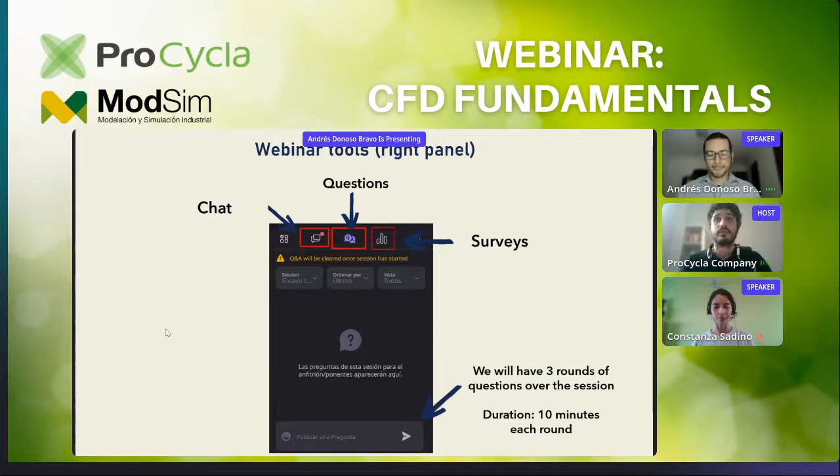So first off, a few words about this team. The name of the team is ModSim, Modeling and Simulation. We basically try to face the challenges that the industry is facing right now, especially regarding circular economy and moving toward fighting climate change. And we do this by exploring mathematical modeling-based virtual prototypes. Thanks to the advances in computation and numerics, we are now able to create virtual prototypes based on models to address these issues at the industry level.

In regards to the content of this webinar, it is broken down into 5 sections, as you can see there. We will start off with an introduction about the main concepts surrounding CFD modeling. From section 2 onwards, my colleague Constanza Sadino will take over, and she will explain the CFD principles, followed by how to prepare the virtual prototype, which software is available to be used, and in the last section we will show you some case studies that you may find interesting.

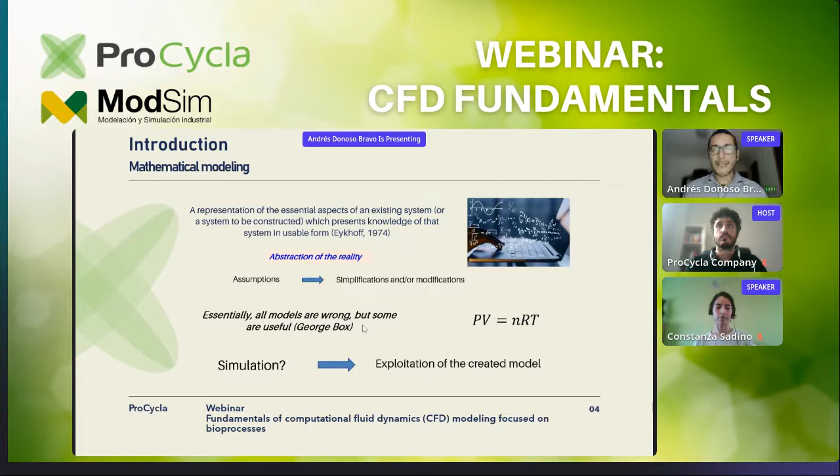Simulation, which is another concept that we often use related to modeling, is basically the exploitation of that model, of the created or taken model. So we can do modeling without simulation, but we cannot do simulation without modeling. So this is putting some concepts there so that we can have a common base moving forward during this webinar.

In regard to models, in general we have two types: phenomenological, which are based on data, where we use data to create these models, and mechanistic models, which are based on the principles of the process that govern a certain system. We're not going to talk about phenomenological models today, but there are several approaches that are very popular now, with machine learning, deep learning, decision trees, several statistical approaches, you name it. That will be worth a different webinar.

In terms of mechanistic models, there are three types: the ones based on algebraic equations, ordinary differential equations, or partial differential equations. But at the end of the day, you're always going to have kind of hybrid models. You're going to take some mechanistic principles, some phenomenological ones as well. So it's always going to be a balance of different approaches. It's not common to have a pure mechanistic or a pure phenomenological model. So those are the types of models that are there.

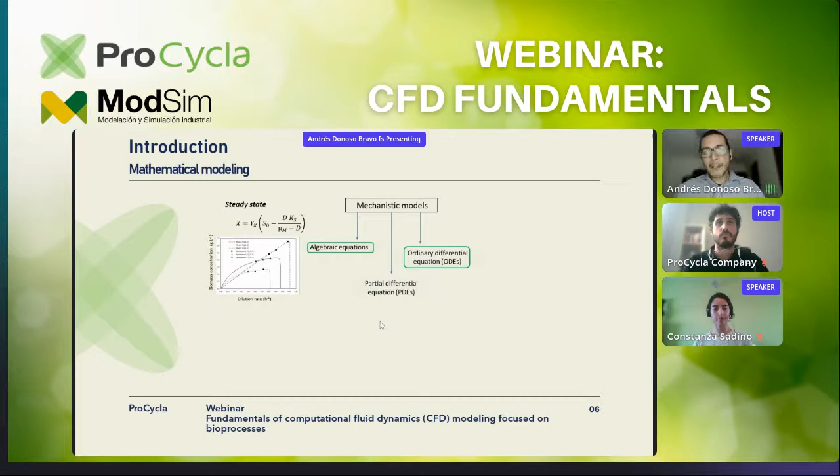Then if we want to consider the transient period of the reactor, not only the steady state, we have to move to ordinary differential equations with this form, which is a derivative. With ordinary differential equations, most of the time we are going to be considering homogeneity, which means that the components of the model are the same regardless of the position inside the reactor. And then we can have this typical graph where we plot the different variables in time, and we have different curves and predictions, right?

And if we want to consider the heterogeneity of the system, which means not only time dependence but also the spatial variation of the components of my model, then we have to work with partial differential equations. So we will have to solve different PDE systems, and most of the time we're going to be working with the Navier-Stokes equation for momentum and other fundamental equations as well. We're going to be getting this kind of nice graph, in 3 or 2 dimensions. So we are getting closer to the physical system. The more complex we get, the more computational cost we are going to be facing. Constanza will talk about that in a little bit.

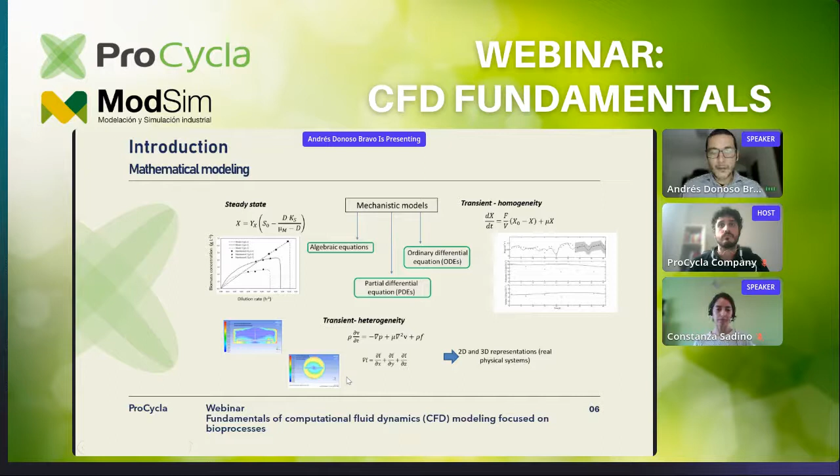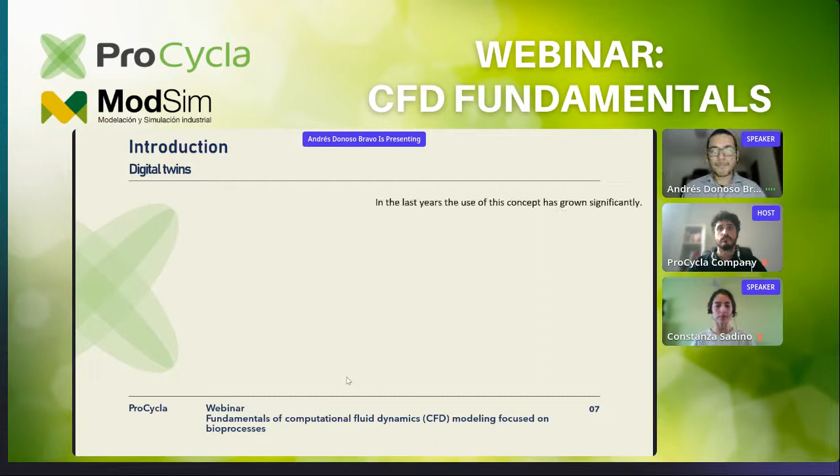So this exponential growth will always lead you to think, well, is it a buzzword? Is it just a trend, or is it an actual concept that is really gaining ground in the scientific world? Well, in my opinion, in many cases, there is not a clear distinction between a model and a digital twin. So if a digital twin is a model, we've been modeling for hundreds of years, so digital twins existed long ago.

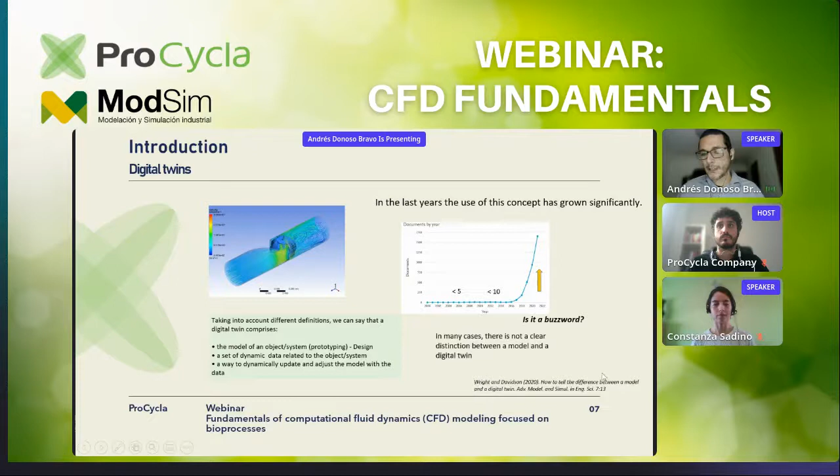If you analyze the literature and the different definitions, we can say that at least a digital twin will have to comprise three things: the model of an object, so the representation of this prototype, so that you can work on the design of it, a set of data that is dynamic in time, and at the same time, you can use this data to adjust and modify the model accordingly. I think with those three things, we can say that we are working with a digital twin. So I recommend this paper here that you can consult. These guys put a nice discussion about the use of the digital twin concept.

So now I will leave the screen to my colleague Constanza Sadino, who is gonna talk about the next sections of the webinar. So please, Constanza, I'm gonna stop sharing the screen. Can you see the presentation? Okay. Yes. Thank you, Andrés, for the introduction.

So now we are going to delve into the fundamentals of CFD. CFD stands for Computational Fluid Dynamics. This is an advanced modeling approach that we can use to analyze and to predict the behavior of a physical system with fluids. Fluids can be gas or liquid. So to apply CFD, first we need to represent the physical system using the transport phenomena equations. These equations represent the balance of mass, momentum, and energy, and how they change in time and in space.

These equations need to be discretized to solve them, so we use numerical methods. We can use finite elements, finite volumes, or finite differences. So we need the discretization of the space and the time, in the case we have a transient model, to solve the equations. And because we have a huge system that is very complex, we have several equations. They are solved using algorithms that are implemented in computational systems. So we could solve a model on our personal laptop, or in the case that the model is too complex, we may need a cluster or another high computational system.

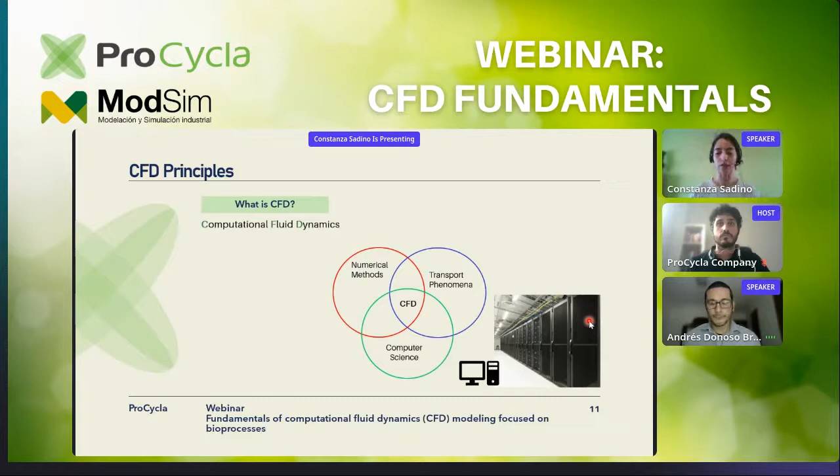In the process of abstraction from the physical system to the CFD model, we will apply simplifications and assumptions that are going to add error to the final simulation. So we have the modeling errors. Let's say we are modeling a tank, and we are focused on the impeller movement, but we know the tank has a heating jacket. But we are going to assume that the temperature is constant and uniform. So that's our first assumption. Then we have the first error.

Then we are going to discretize the system, so we have the error that will depend on the numerical method that we are using. And finally, we have the solution error that will depend on the solver that we are using to solve the simulation. All these errors, we cannot avoid them. So we have to try to minimize them. And when we minimize an error, we are increasing the computational cost. So when we set up a simulation and when we solve it, we will always be dealing with the trade-off between accuracy and computational cost.

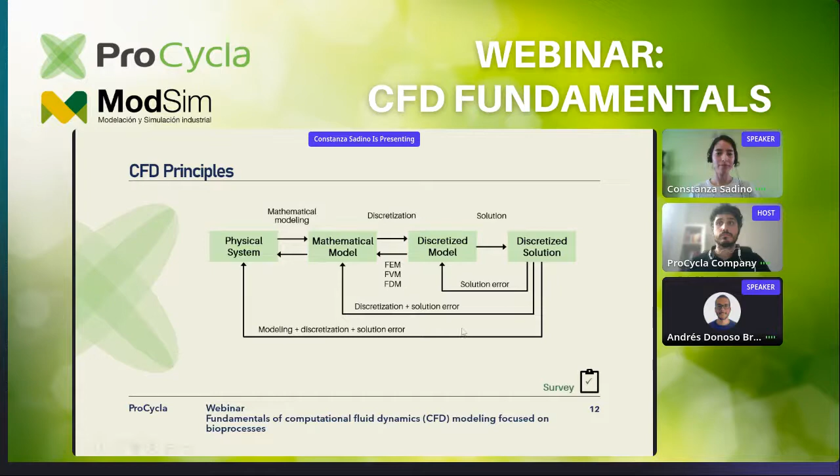So we will have now the first survey. Okay, I'm gonna push it. It's charging. Yes, I'm doing this. Okay. We would like you to answer this question: do you know of any process or system that could be modeled by CFD? So we invite you to answer this question, whether you knew about CFD before this webinar, or if this is something new for you.

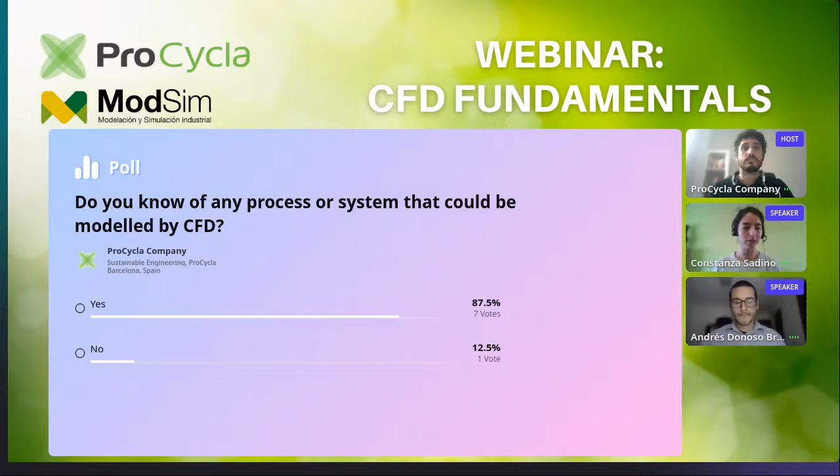Okay. Thank you, Juan Ignacio. Okay, so I think I need to share the screen again. Yeah, I think. Okay.

Can you see the presentation? Yeah, it's available. Thank you.

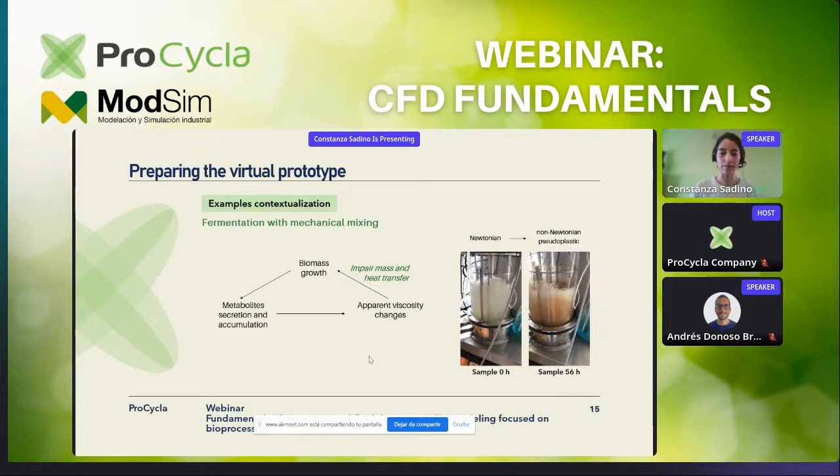So because we cannot model exactly the kinetics and the whole fermentation, we apply a more simplified strategy. So we use three fluids to represent the fluid dynamics of three different stages of the fermentation. So we can use, for example, water to represent the fluid dynamics of the system at the beginning of the fermentation, and we can use two non-Newtonian fluids to represent the intermediate and final stages of the fermentation. Solution A has a higher viscosity than the other solutions under the same operating conditions.

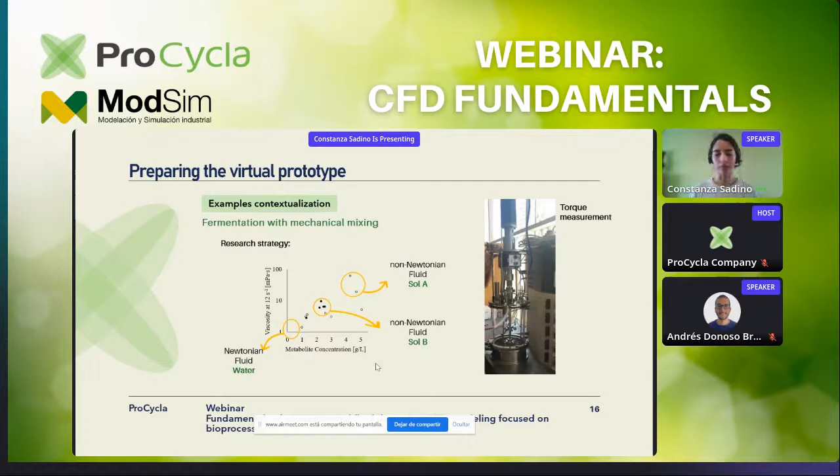Also, if we use this strategy of using abiotic fluids to mimic the fluid dynamics of the fermentation, we have some advantages. So, for example, we can isolate the effect of the impeller mixing from the effect of the aeration, so we can understand how they interact. To measure the effect of the viscosity on the fluid dynamics, we measure the torque on the impeller. So this is the main variable that we use to validate the model. And we will know what is the validation later.

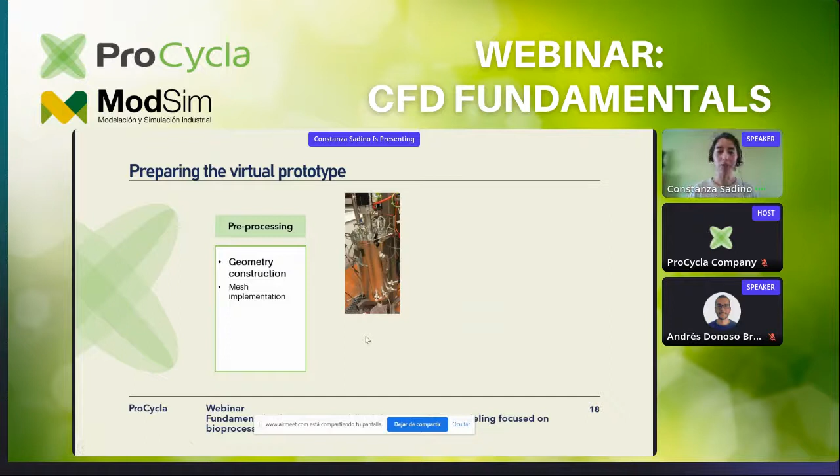So let's see how we start the pre-processing stage. So if we have this tank, okay, we need to have a virtual representation of this tank. So the first thing that we could do is to build this geometry through computer-aided design. However, this domain is not useful for CFD because CFD uses the domain, the volume that the fluid is using. So, for example, we don't need the external structural support. So, what we need is the volume of the fluid. Okay.

Also, we have to consider the simplification of the geometry. There are small details that we can delete from the domain and that will not affect the fluid dynamics. So, for example, we don't need to model the screws. Also, we need to think how we are going to represent the phenomena that we want to model. So, in this case, to model the movement of the impellers, we need to divide the geometry with these cylinders around the impellers in order to be able to set up the reference frame for the movement. Okay, and also we may need to divide the geometry further in order to improve the quality of the mesh.

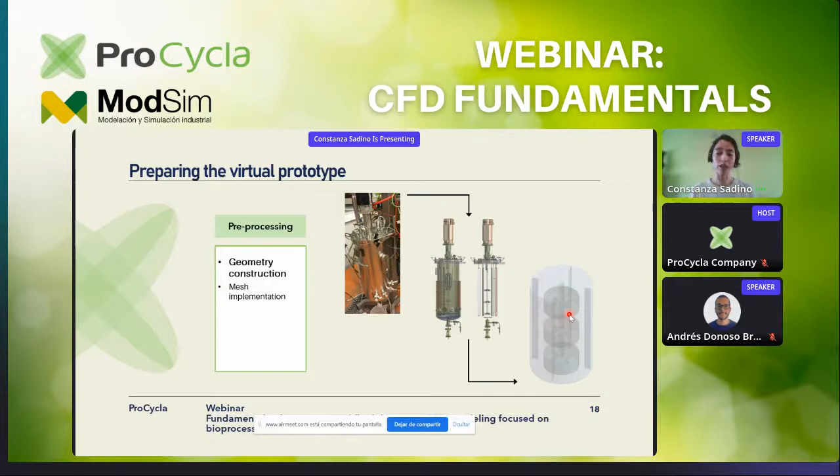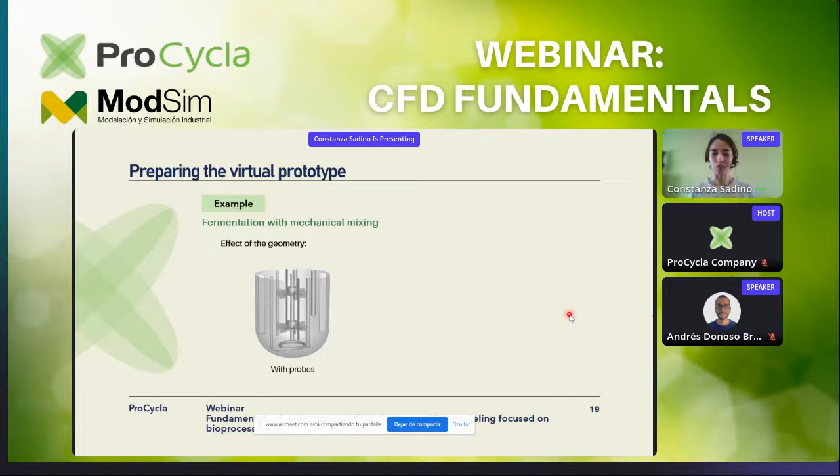So we have to consider what is the purpose of the model in order to conclude if this simplification could change the conclusions of the final result or not. Okay, so there is not a correct or incorrect answer here. It's just the purpose of your model that determines what you can do without affecting the final results.

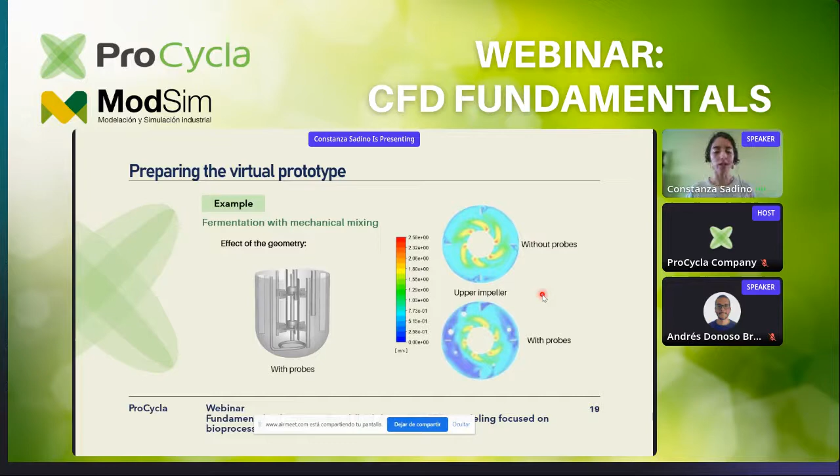So if we have an irregular geometry, tetrahedrons will be the easier and faster way to mesh the geometry, but tetrahedrons add numerical diffusion. What means a numerical diffusion? It smooths the gradients artificially, so we have a less accurate result. On the other hand, the hexahedrons, they are more accurate. Like they can give us a more accurate result, okay?

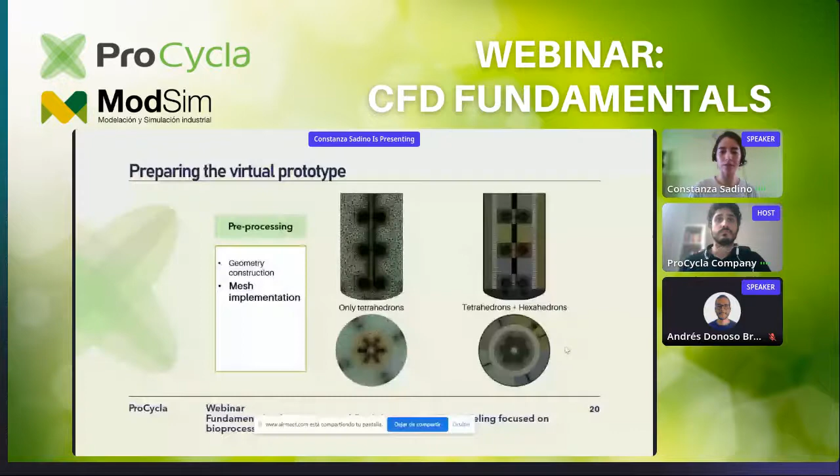So thank you for your participation. Now we will continue with the presentation. Can you confirm if you can see the slides, please? Yeah, it's available. Okay, thank you.

So now we have the geometry and we have the mesh, we need to define the models that are going to represent the phenomena that we want to study. So we need to characterize the system. How is the flow regime, which type of fluid we are working with, how many phases we have, do we want to model the species transport, do we want to model the temperature, or we want to see this as the stationary state, or we want the transient state. All these things are going to define the final model that we are going to simulate.

So let's see how we choose this. So we'll have some criteria that will be based on the physics of the system. So for example, if the system is laminar or turbulent, that will depend on the Reynolds number of the system. Let's say that the system is turbulent, then we will have to use other criteria to choose the proper model. So depending on the complexity of the system, if it is too complex, we will prefer to choose a model that will help us to stabilize the solution. So we will use k-epsilon.

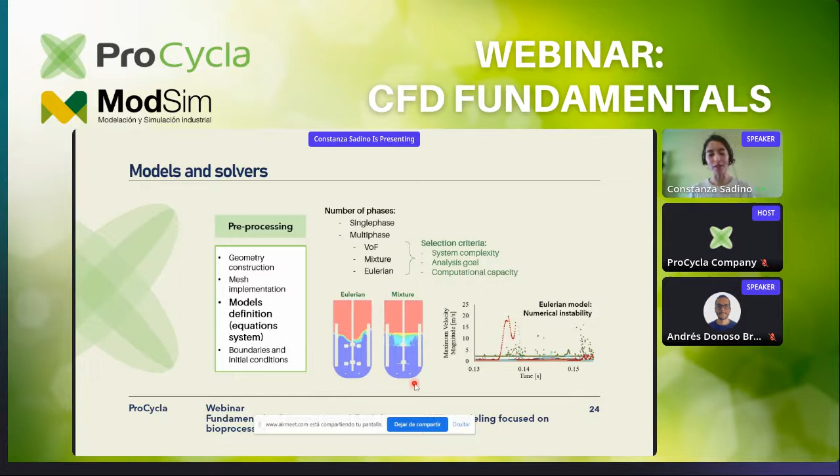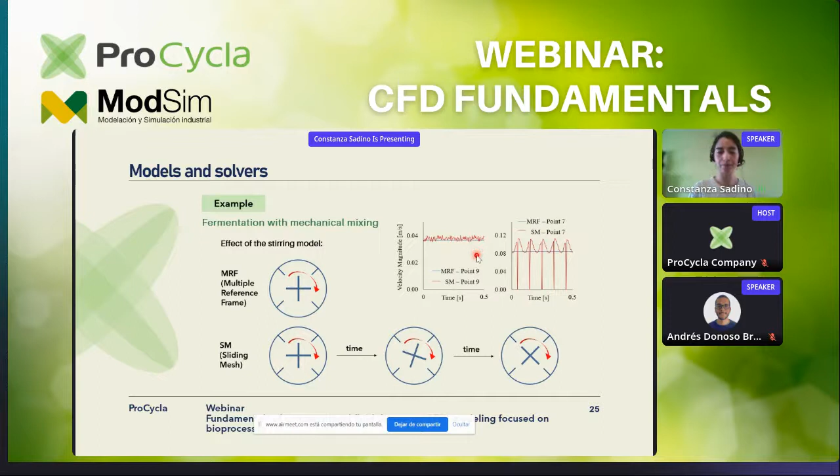Once we have the models, that means we have the equations, we need to define the boundary and initial conditions that will allow us to solve the system of equations. For that, we need information such as, for example, the tank: is it closed or is it open? If it's closed, we will have no slip condition, which means that the liquid is touching the cover, and so at that point it's not moving. If it is open, then we have an interaction with air, so the air is not impairing the movement of water, so water moves freely. Those conditions are different, so we will have a different solution depending on which one we use.

Also, we have to define the initial condition. So is the system initially at rest? Or also, if my system is unstable, like if the models that I choose are unstable, maybe I should select an initial condition that is going to help me to stabilize the solution first. All those things we have to take into account when we are pre-processing the model.

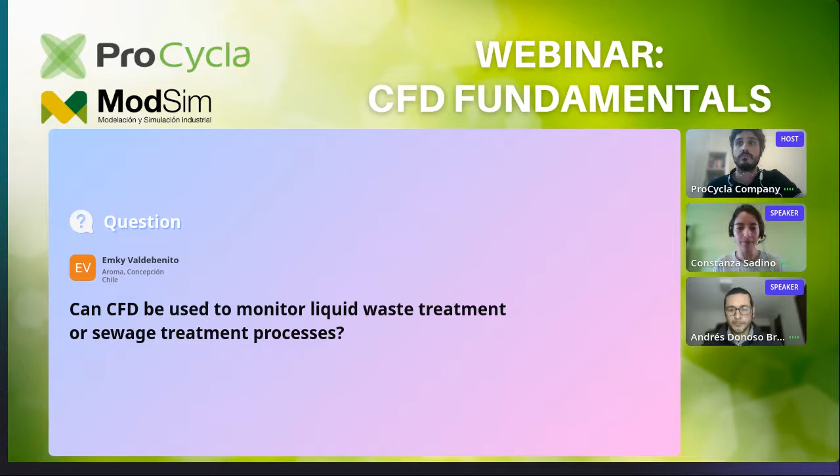If I can translate it, if you want. Yeah. So, which kind of criteria do you use to decide until which point you want to get a more complicated model to get a more accurate answer?

So, well, first, it will depend on the resources that you have to solve the model. If you're using your personal laptop or a cluster, then you will have different limitations. Also, the time. Like, if you can wait for 12 months or for 1 month, then that will also put a limit on the complexity of the model.

Also, you have to take into account what you are going to use the model for, and also the level of accuracy that you have for the experiments, because you will need to validate the model. We will see that in the next sections, and the validation is against experimental data. So you know that we always have error in the experimental data. So we cannot validate the model with a higher accuracy than the accuracy of the experimental data.

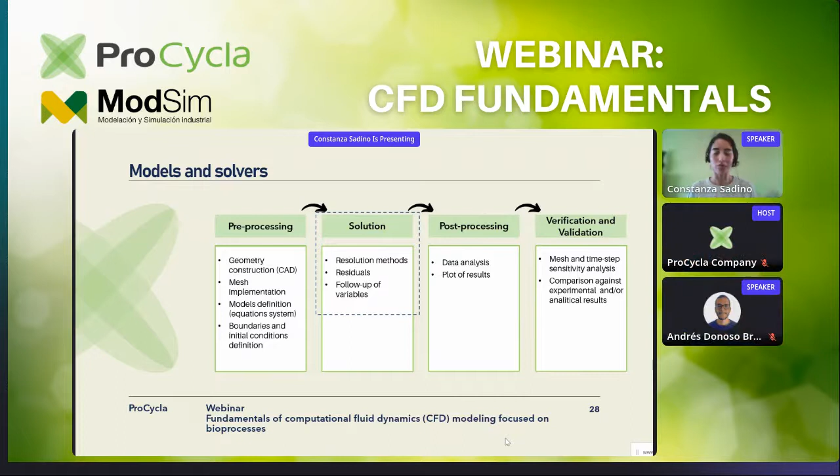Better. Okay. So once we have the pre-processing stage ready, we can solve the model. How do we do that? So we need to use the solvers. The continuity equation of transport phenomena has the density as a variable. CFD couples the density and the velocity that is in the continuity equation with the pressure. Okay, and for that we have to select the solver.

If we want to have a cheaper choice, we could use SIMPLE. But for SIMPLE, if we have a transient simulation, we will have to use a finer time step than if we use PISO, for example. So again, it's a trade-off between accuracy and the computational cost that we can afford.

Also, the discretization methods: we can use first order, that is going to be faster and easier to stabilize, but is less accurate. Or we could use second or higher order, that may take longer to stabilize and to finish the simulation, but is more accurate. So, as I have said before, it's always this trade-off between accuracy and computational cost, and also the stability of the simulation.

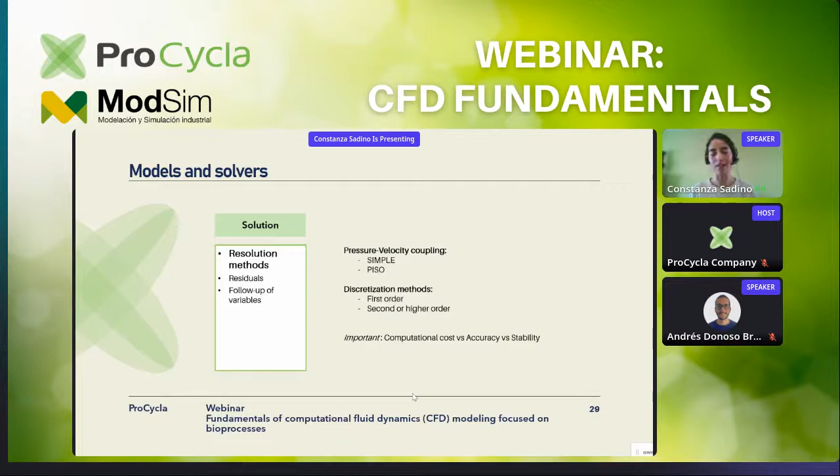When we are solving the system of equations numerically, we have a set of iterations. To measure the convergence of the iterations, we have to follow up the residuals. Okay, so there are some ideal values that we should expect to have. Below 10 to the power of -3 is the ideal for engineering purposes, but if we can have a solution that is below 10 to the power of -5, it's better. And for purposes of publication, like to have an article in a journal, probably you will be asked to have a residual below this value.

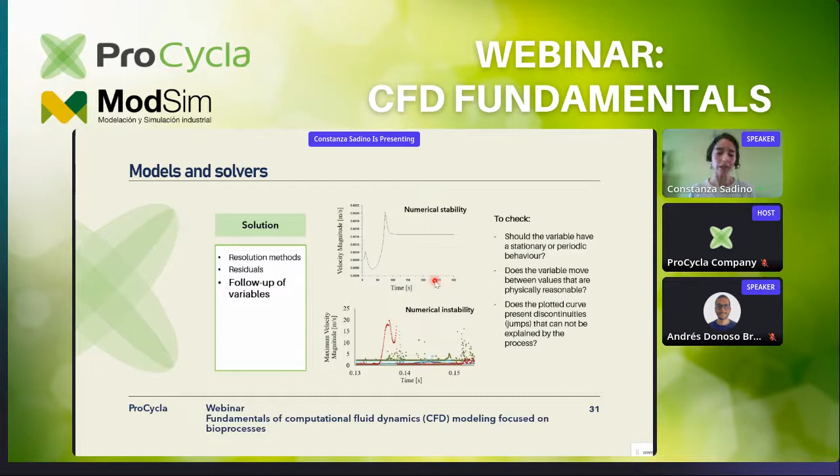Even if we have very small residuals, the solution may be unstable. So we have to check other variables that are critical for the model. For example, in the case of the tank with the mechanical mixing, we need to monitor the velocity. And depending on how that velocity is behaving, we can identify if we have some numerical instability.

And we have to take into account if we are expecting a solution that is stationary or periodic. We have to take into account which values have a physical meaning for our system. And if we see discontinuities, if we see jumps in the values, then probably we have a numerical instability. And we need to improve the models, choose another model that is more stable.

So here we have another survey. Okay, Juan Ignacio, you can. It's already published, right? Okay.

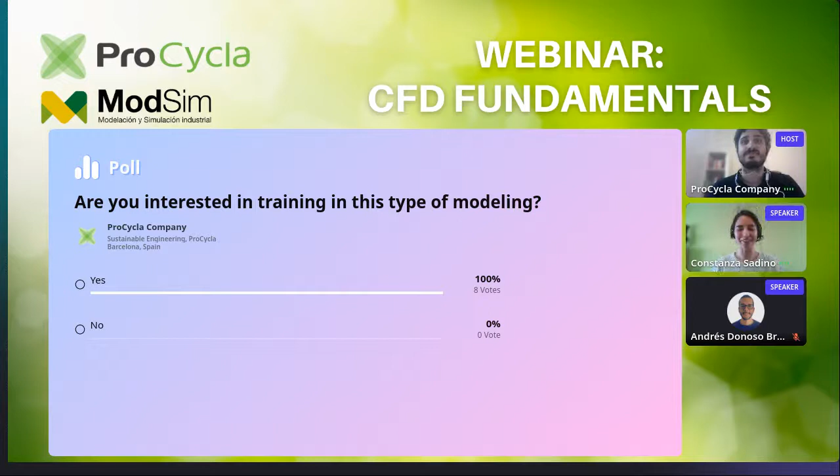Right now. Okay. So are you interested in training in this type of modeling? Would you like to learn how to implement a CFD model? We invite you to answer this question. So yes, everyone that answered the survey agrees that they would like to learn more about CFD. Perfect. So let's continue.

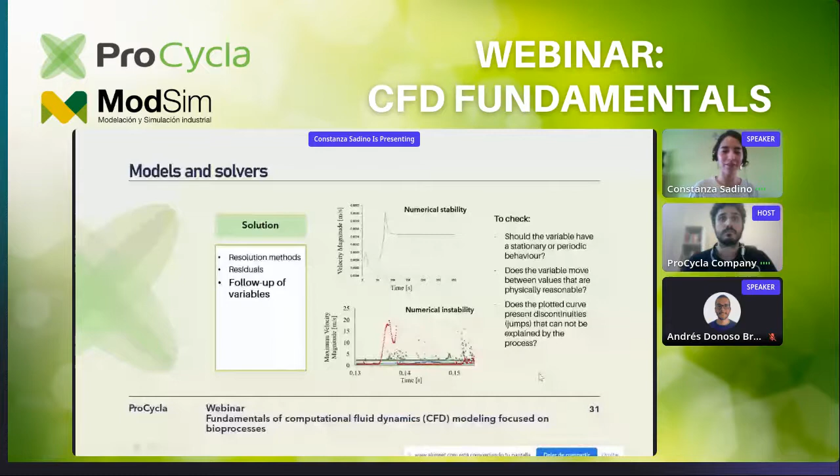So first, what is the purpose of your study? What experimental or analytical information do you have? So if you have information about the velocity, then probably you want to plot the velocity and compare the experimental versus the simulated values. What do you need? You need the information for a point, for an area.

For example, you want the concentration of certain species at the outflow of your system, or you want a volume value. Do you want to see the changes of these variables in time? All these things we have to have in mind when we are setting up the model to be able to analyze them at the end. How can we visualize this information?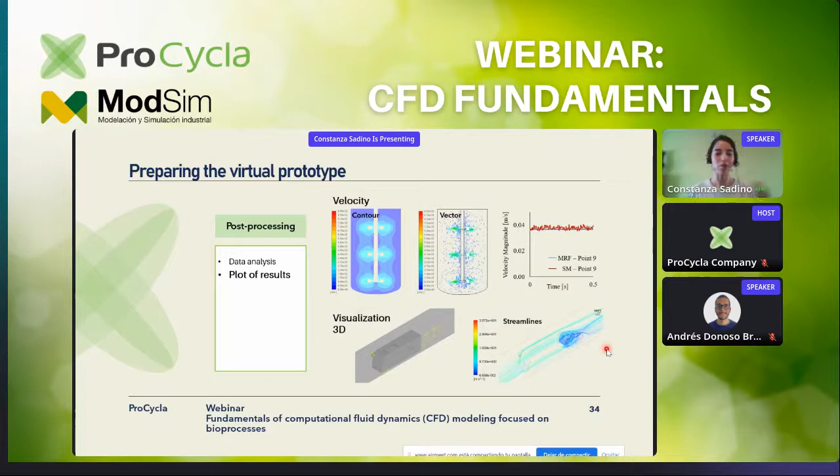Well, this case is a bit different. Here we have a bus, and here we are visualizing the air vortices that are formed at the back end of the bus. And for that, we use streamlines. So as you see, we have many options to visualize the result, and that's one of the strengths of CFD, that allows us to see our system from a different perspective.

Finally, we need to go through verification and validation. So what is verification? If you remember, we use a discretization to solve the system of equations. So the level of the discretization, how small is the cell that we are using, is going to affect the result. So we need to assess if we are using a cell that is fine enough to capture all the phenomena that are inside our system.

So for that, we will use different meshes that are going to be similar in the sense that if you have a refinement around the impeller, the three of them are going to have the same zone with a refinement, but we will have a coarse mesh, a medium mesh, and a fine mesh. So what is the purpose of this? If the coarse mesh has the same result as the fine mesh, it means that the coarse mesh is fine enough to simulate a result that is not affected by the discretization.

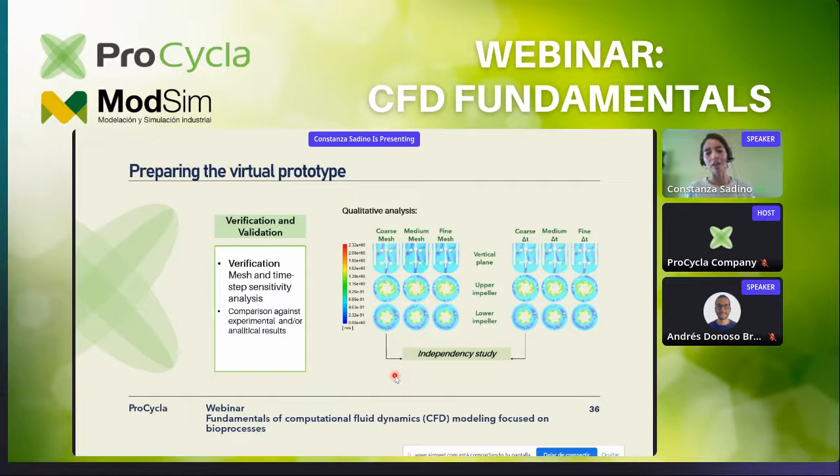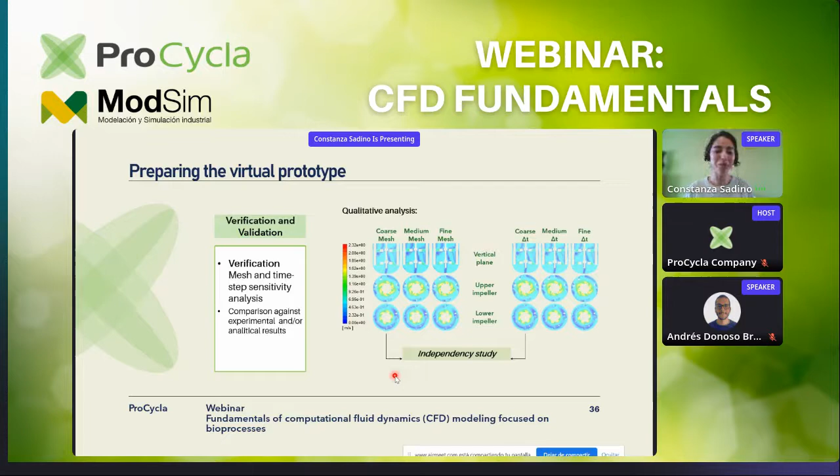Okay. The same if we have a transient simulation. The time step we choose has to be fine enough to capture all the phenomena that we have in the system. If we have this condition, then our coarse mesh is independent from the discretization. Okay, so the idea is to have a fine mesh that is able to capture everything, but that fine mesh has to be as coarse as we can in order to save computational resources.

When we have the verification done, we have to assess the model to check if we are modeling the physical system properly. For that, we can use different variables. So the ideal variable is a global one, where with one parameter you capture the fluid dynamics of the whole system. So for example, torque. Torque is able to capture the effect of the viscosity with just one parameter, but with the effect of the viscosity in the entire system.

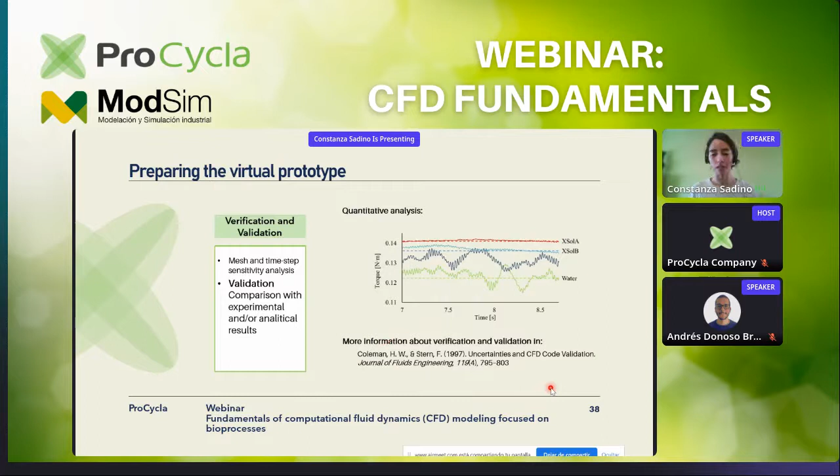There are some parameters that you can calculate to have a final validation. That's beyond the scope of the webinar, so we left you here the name of the paper that you can read in case you want to know more about this.

So we are in the second round of questions. Right. We have a question by Javier Saleh. I didn't understand how to represent the movement of structures in the geometry.

Okay, so in the case of the tank, you have to define a cylinder that is surrounding the impellers. What you will be modeling actually is the movement of the cylinder, because you will change the reference of the movement. You will use the cylinder as reference for the stirring of the blades, and then you can use two approaches. You can use a steady state approach, where the impeller is fixed and you have kind of an average velocity. Or you can use a transient approach where you actually see the movement of the impellers and the effect of the passage of the blades, how the velocity changes in time.

It's a bit complex, but the main idea is that the reference of the movement is changed. So the equations include a different velocity for the movement of the impellers.

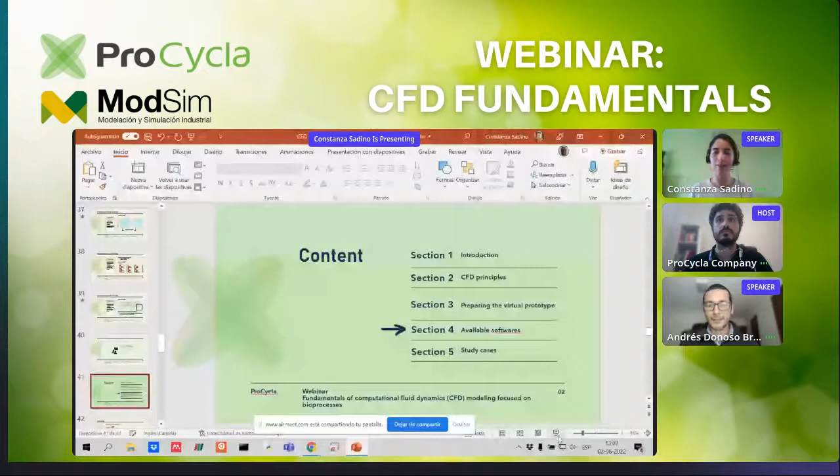Perfect. So I mark it as answered. Okay, let's wait a few seconds if there are any more questions. I would say let's continue because of time. Okay, perfect. We have a certain time frame, right? Okay. There will be another section of questions at the end. Yeah. Right. Okay.

So now we know how to prepare a CFD model, and we need to know which software we can use. We have commercial software, and we have free and open source software. The free and open source software is mostly focused on certain tasks of the workflow to implement a CFD model. So if we use open source software, we may need different software for each stage: one for the geometry, one for the mesh, one for the resolution, and another one for the visualization. So here we have how Blender looks.

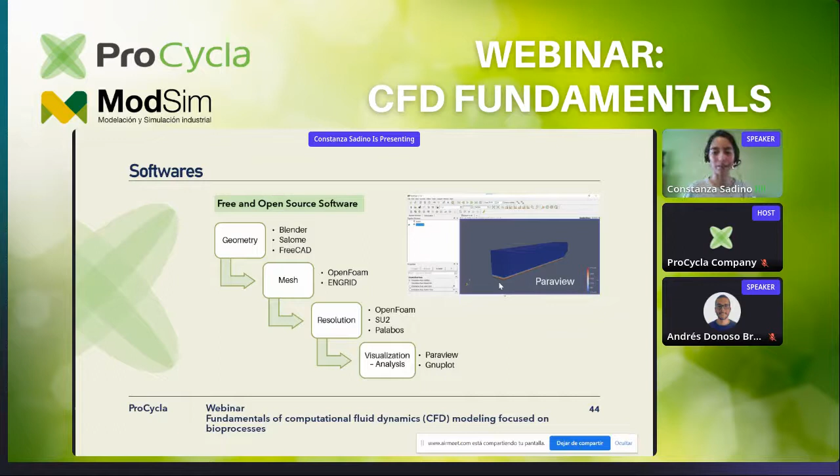In the case of the commercial softwares, they have tools for the task of all the stages. So, for example, ANSYS provides a software for the geometry, a software for the mesh, software for the solution, and a software for the post processing. And it's very user friendly. You can see here you have boxes, buttons, and you just press them, and you define your model.

Because it's very easy to use, also it's very easy to abuse, as my PhD supervisor says. It can be sometimes a disadvantage because sometimes we don't know what we are pressing, we don't know what it means. So you have to be aware of what you are defining when you press a button.

And also because of that, it is less flexible than OpenFOAM because you are not coding your model, you are just using the model that is already coded. So it's less flexible.

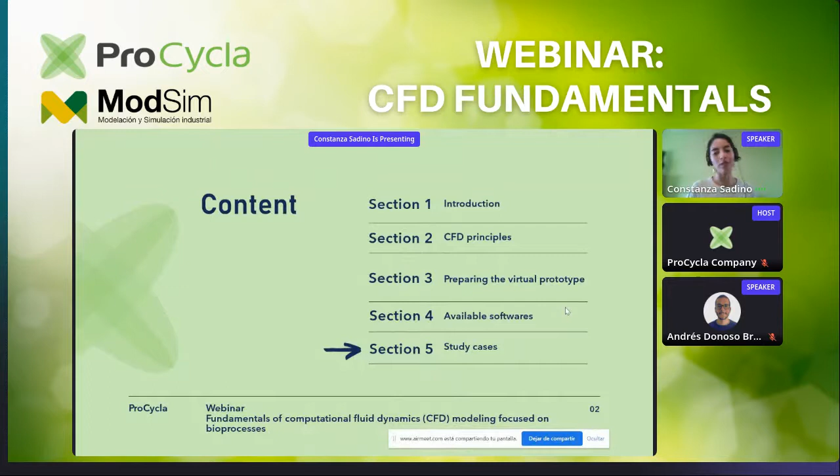So now let us see some study cases to see how we can use CFD on bioprocesses. Okay, so first we have the case of biopolymer production. So in this case, we have a tank. It has two impellers, and during the process, the viscosity of the fermentation broth changes and it increases. So how does that change the fluid dynamics of the system?

So we could expect that close to the final stage of the fermentation, we will have higher mixing times because we have this flow pattern that is named parallel flow pattern, which means that the impellers are working independently from each other. So that means that we don't have much interchange of fluid between the compartments, so it takes longer to mix properly.

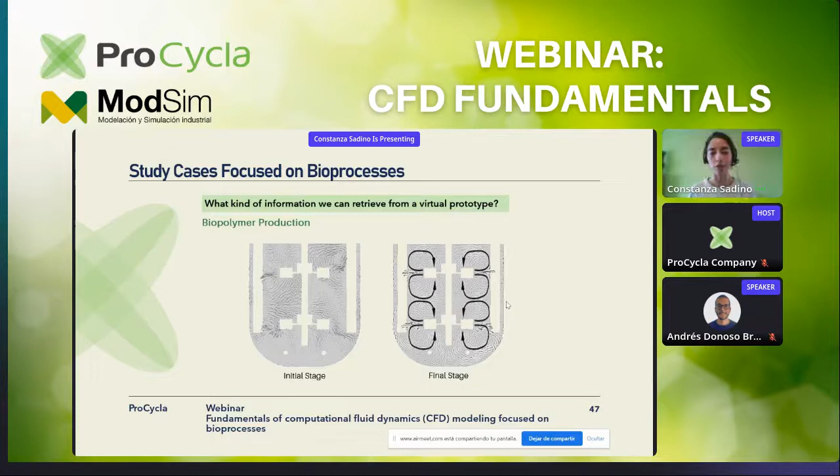Why is that happening? Why do we have this kind of flow patterns and why are they changing? We can answer that looking at the vortex formations. Here we see the evolution of the vortex that we have around the axis of the impeller, and we can see that the vortex has a shape that changes as the viscosity of the fluid increases. And this shape of the vortex could explain the evolution of the interaction between the impellers.

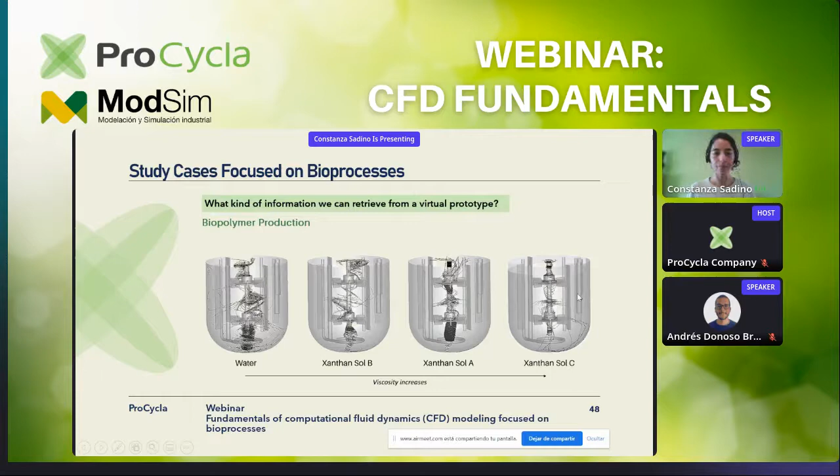This vortex is also important because it's going to help us to avoid the sedimentation of particulate matter in the bottom of the tank. So here we can see a swirl that is moving upwards. Okay, this phenomenon is called Ekman Layer, and it helps us to move the microorganisms that are in the bottom of the tank upwards to keep the system well mixed.

And we can see how this vortex changes as the viscosity increases. So we could expect that at the final stage of the fermentation, we will have a more significant sedimentation of particles, and therefore we'll have a system that is more poorly mixed.

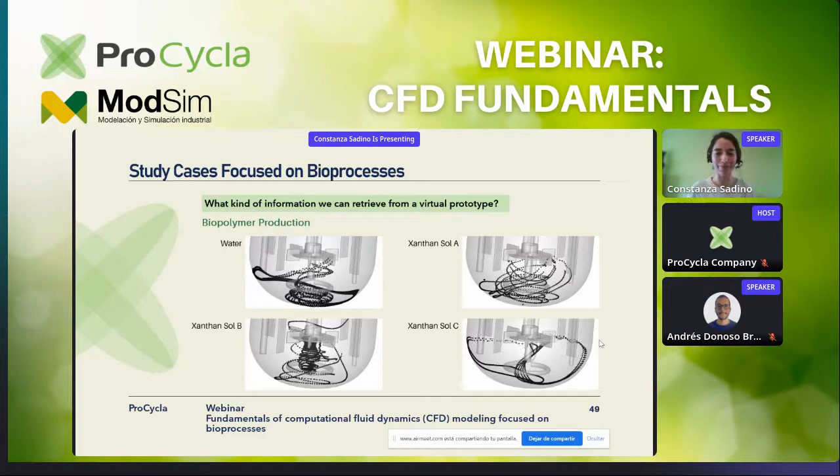There are other vortices that are very important. These are the trailing vortices. So they are formed behind the blades as the impeller moves. And here we can see, okay, I think you should be able to see the videos. The trailing vortices are moving.

And you can see that as the viscosity increases, the vortices are shorter. Okay, so the length of the vortices changes and the area that they span is reduced. This means that the mixing is being impaired by the viscosity, because these trailing vortices are actually responsible for the mixing process. So as we have changes over the fermentation, we can see that the trailing vortices are evolving as well.

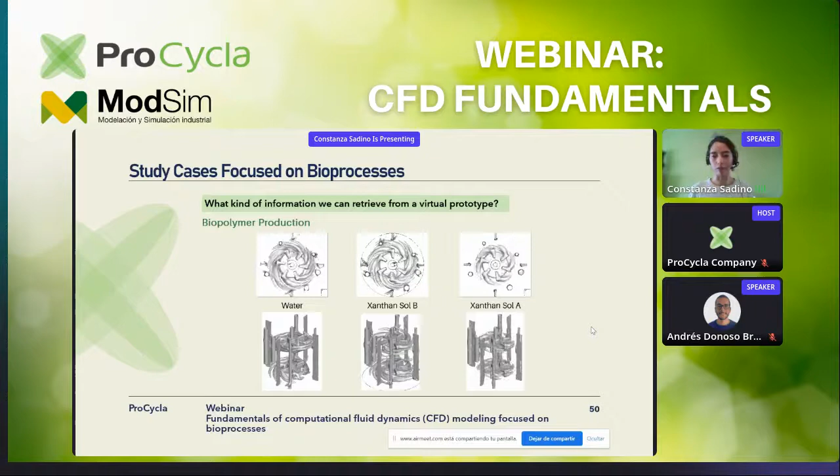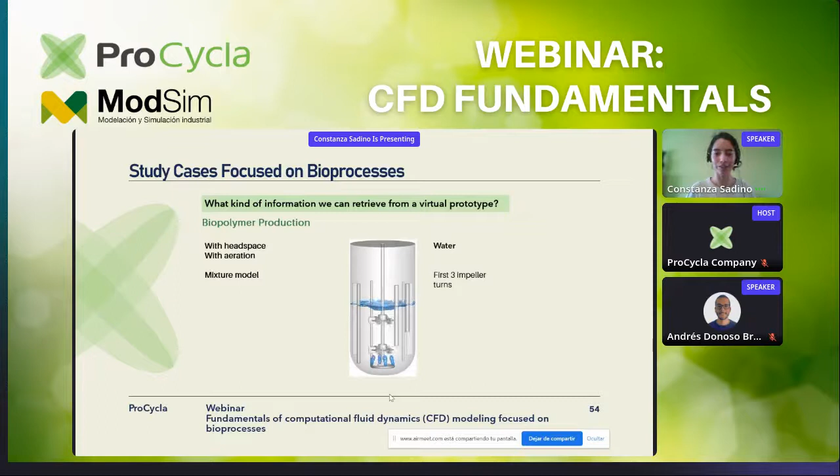Here I'm going to show you a video. So the surfaces that you see in this video are the interface between the liquid and the gas that we have in the system, and the color that you see here is the velocity. So blue means that it is at rest, 0 velocity, and a more red color means a higher velocity. So I'm going to play the video.

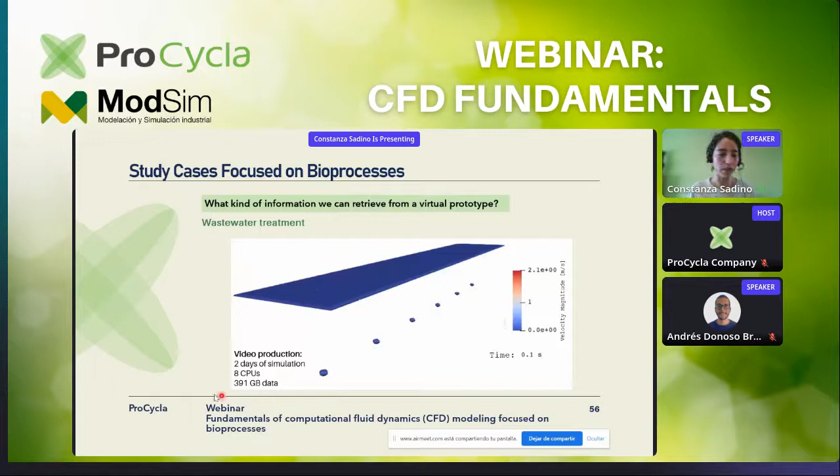Not working. No. So here we can see the effect of the injection of gas on the surface of the liquid. We can see how the waves move in the surface, and this is going to provide us very useful information to optimize the position of the gas injection. This video took almost 2 days of simulation, and you can see here that we have almost 70 seconds of process. We use a computer with 8 CPUs, and we use a bit less data than in the previous video that I showed you.

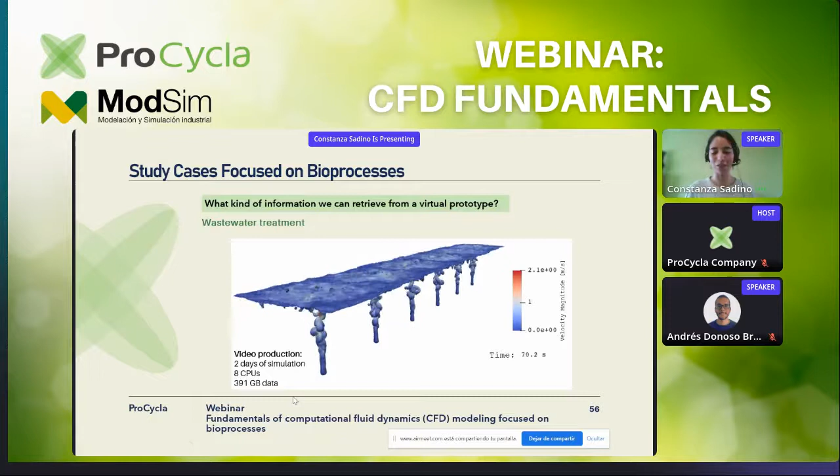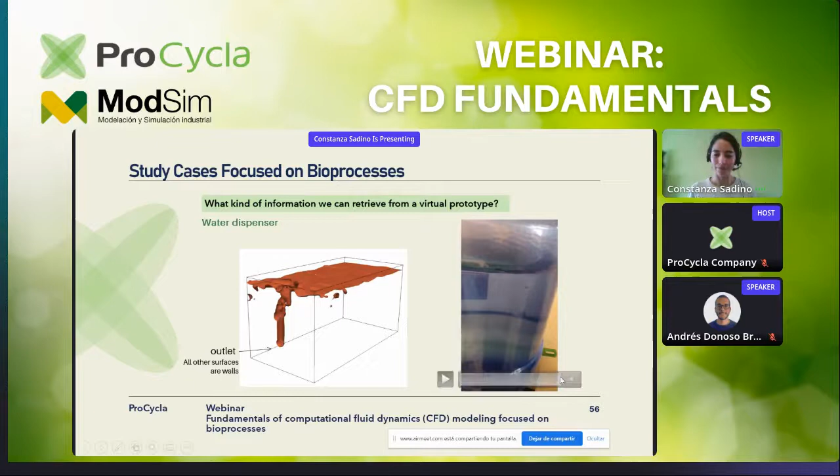So to conclude, there are some prospects for CFD. CFD is very, very useful to complement the experimental research because there are several variables that we cannot study experimentally because it is too expensive, too difficult, too dangerous. So in those cases, CFD can help us to gain information. And particularly in the industry, CFD can be used to improve the design and optimization of the reactors and other equipment too.

There are some challenges that remain to improve the CFD modeling. Particularly, we are working on coupling the fluid dynamics with the microbial kinetics to have a more integral CFD simulation. This is very challenging because fluid dynamics and the kinetics have very different time scales. So that's something that has to be solved.

And also we need maybe to face that we have a very high computational cost if we want to simulate long-term processes. For instance, you already saw that to simulate a fraction of a second, it took almost 4 days. So what if we want to simulate a process that takes 72 hours? It would take us years. So there is still a challenge there.

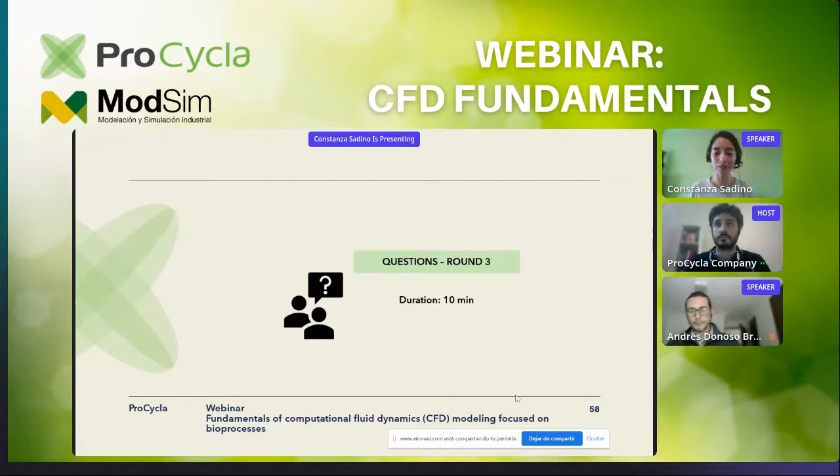It says, I want to know if there are models that include pneumatic agitation by gas recirculation. Yes, that's exactly what I showed you in the last examples. So in this long video, what we have is pneumatic agitation, and with gas recirculation. So you can have a multi-phase model to represent that.

Yeah. So I wanted to add something about this, in regards to coding. When you use OpenFOAM, the free access software, it's true that you have to code more, but you don't have to code the whole equation from scratch. There are solvers already there, ready to be used, so it's already very well packaged. The thing that you have to code is more or less the interaction between all the settings of the models, and that's something that you don't need to do when you use Fluent, for instance. But yeah, there is a big amount of solvers already programmed and verified in OpenFOAM that you can also get a hold on.

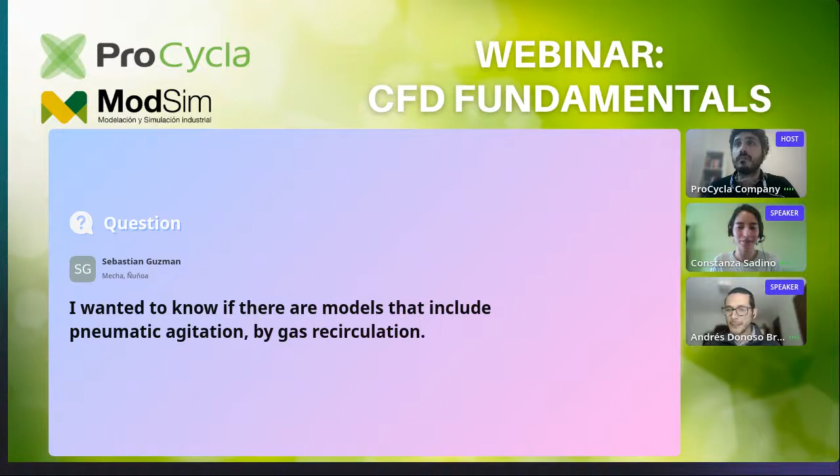Okay, well, I think there is another question. Yeah, I will join in stage. Let me copy it because it's in the other menu, so I will copy it and I will show it. So,

I'm doing a Master of Engineering Sciences, and my thesis is about simulating an airlift reactor and validating it with the data of a reactor we have in the lab. I will take a course of CFD the second semester.

I think in the previous round it was about a digital twin. When you have a project with industry, it's good to have a good control of the expectations. Sometimes people imagine that it's easy just to get the virtual prototype of your process, run simulations, and have hours and hours of simulated operation, and that could be true if the system is simple. If it's just water... if it has air, if it has solid, then you have multi-phase, you are adding more complexity, and that will take more time to be solved.

So CFD, I think, is the proper tool to create useful digital twins, but you will always have to see if what the industry needs is feasible to do through CFD modeling. So it's good to put your feet back on the earth and then see if what they want is actually doable or not with modeling. Yes, it's true. We have computational limits.